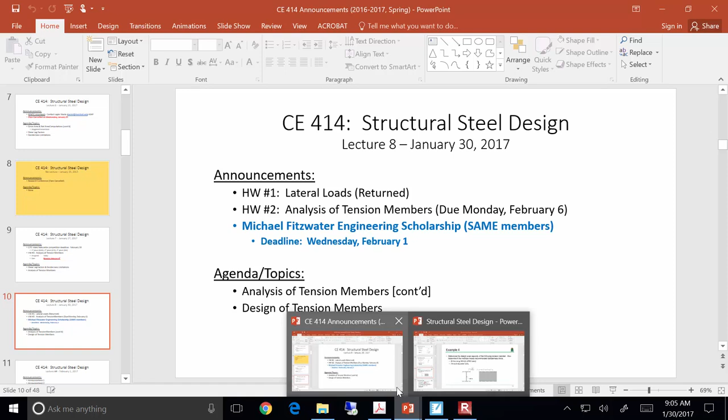Everybody good? All right, so today what I want to do is finish out that analysis example we were looking at, and then we finally get to start talking about design. So we finally get to start doing some design stuff today, and I'm pretty excited. But before I get into that, I want to do a little recap on what we were doing with our analysis example - this is probably a good place to start.

For the initial part of our tension member discussion, we were focused on making sure we knew how to assess two things: net area, which we spent a fair amount of time on, and shear lag factors, which we took a deep dive into last time. Ultimately I think it was pretty straightforward, but if you've got any questions, just let me know.

When we're talking about tension members, we really looked initially at two limit states: yielding in the gross section of the member, and fracture in the net section of the member. As we found out last time, it's not necessarily as clear as you'd think in terms of which one governs.

If you take a regular tensile specimen like you used in civil engineering materials and yank on it, yielding obviously occurs before fracture. But we're not cutting through the same section when we look at these members. Here we're looking at the gross section, and here we're looking at the net section.

When we did our analysis example last time, we found that fracture governed for that particular member because the net section governed. We had a smaller effective net area compared to the gross area, so that was ultimately the capacity that governed, which we'll get into the specifics of in a bit.

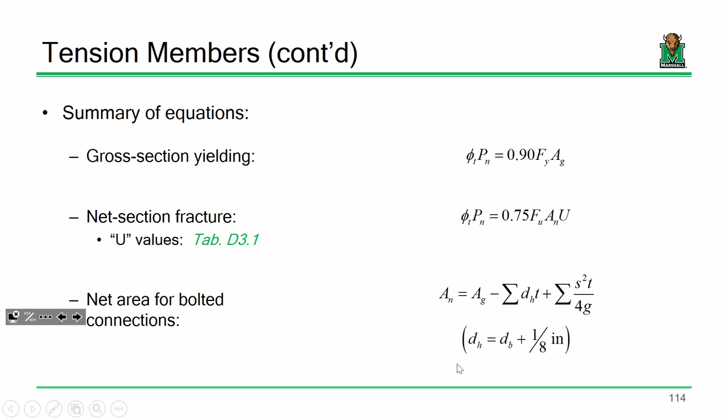Remember, we adjust that net area by a shear lag factor. Arguably the most common one is case 2. Shear lag factors according to case 2 are 1 minus x bar over L, where x bar is the connection eccentricity and L is the connection length.

Connection length is measured from outermost bolt to outermost bolt, and the connection eccentricity is from the back of the connected member out to the centroid. So it's just making sure you're using the manual appropriately and looking up the right values.

Now slenderness, we haven't done that yet today, but we're about to do it in a second. For slenderness, you just ensure your L over R is less than or equal to 300. We're going to add to this later, actually we'll be adding to it today, but that's where we're at so far.

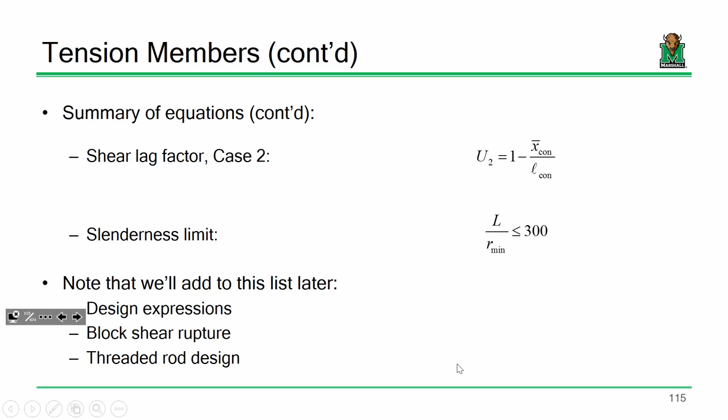This is the member we were looking at last time: a W8 by 24 used as a tension member, with 2 lines of bolts in each flange, and each line had 4 bolts. The member's made out of A992 steel, 40 feet long, with 3/4 inch diameter bolts. You've got all the dimensions necessary to assess the capacity.

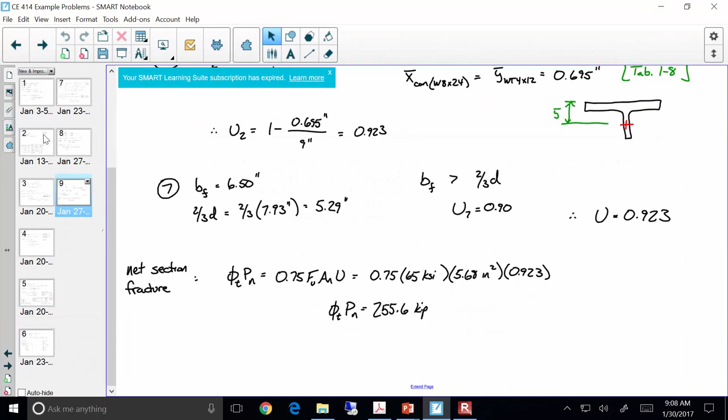We were looking at gross section yielding and net section fracture, so we went through our calcs. Let me go to right here—these are the calcs that we did last time. Starting off, we have our W8 by 24, so we looked up all the appropriate properties.

We haven't used the radius of gyration yet, but let me ask: for the W sections, which is the smaller radius of gyration, Rx or Ry? Ry—just making sure everybody's paying attention. That's one thing you'll always find for W shapes: Ry will always be smaller. It's just the way we notate steel sections.

If you have an I section, I sections by and large are stronger in one direction than the other, and that's what Ry and Rx indicate. Ry being smaller indicates that the I shape is weaker when bent about that weak axis.

We'll become experts at assessing slenderness later when we look at columns and members subjected to compression. Members in compression behave significantly different than members in tension, because members in compression like to do this little thing called buckling—that becomes a whole other can of worms later. For now, we're just looking at basic slenderness calcs, so we'll just go off of our Ry.

We looked up A992 steel properties and started computing values. We calculated two limit state capacities: gross section yielding, which gave us about 318.6 kips. So if I take this member and yank it, the gross section will yield at a load of about 318.6 kips, keeping in mind we've adjusted that with a safety factor.

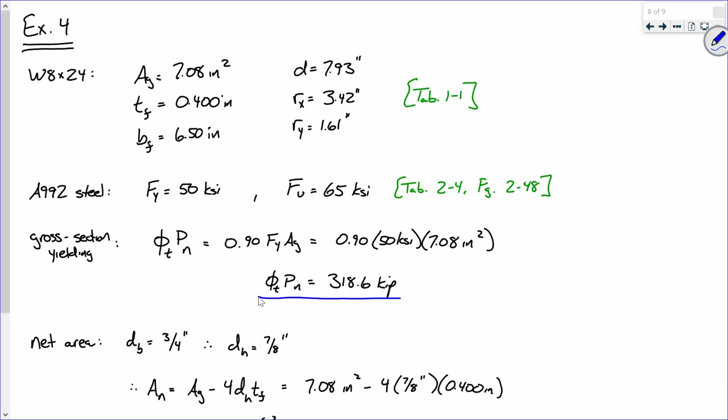We use our resistance factor of 0.9. Now that's for yielding in the gross section. For the net section, a little more work needs to be done because we have to calculate the net area.

Which we got as 5.68 square inches. Then we got to figure out which shear lag factor governs.

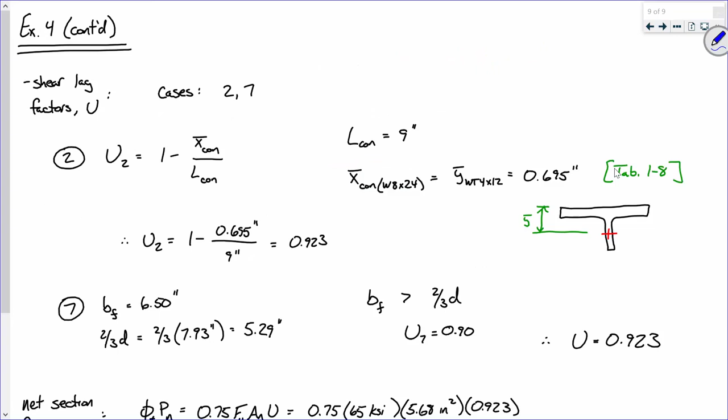So we calculated according to case 2. Remember case 2, we looked up the appropriate Y bar for the equivalent WT. So if it's a W8 by 24, we look up the Y bar for a WT 4 by 12. Remember, you're cutting the depth in half, and then you're cutting the weight in half. So it's a WT 4 by 12, and that comes out to be 0.695 inches.

So here's our U2, comes out to 0.923. And then U7's really just following the table and following the spec, that comes out to be 0.9. And then which one do you use? You use the larger according to the notation in case 7. And then finally we get a capacity of 255.6 kips.

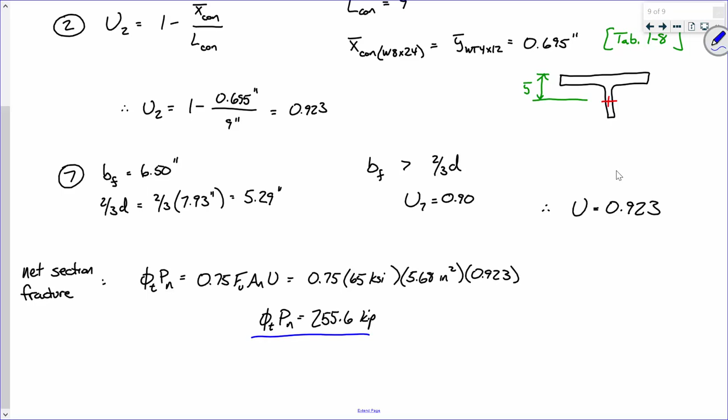Is everybody okay with that? Everybody good with that? Okay, now, so if everybody's good with this, I'm going to move on to the next slide because I got a couple things I want to do.

All right, excuse me. All right, so let's just sort of summarize where we're at so far. That U does not look like a U.

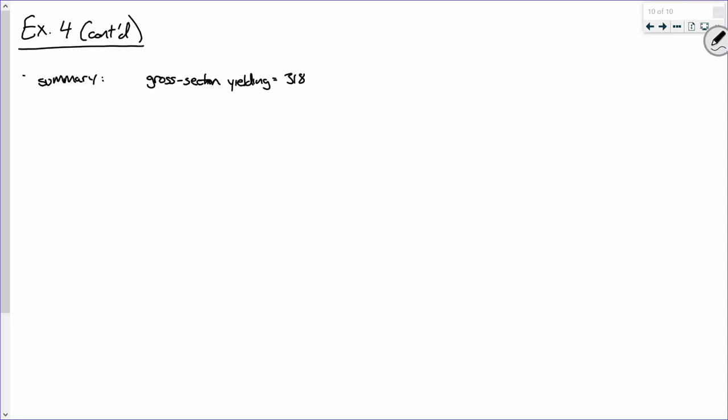So summary. If we look at gross section yielding, we got a capacity of 318.6 kips. But for net section fracture, we got a capacity of, what, 255.6, was that right? There we go.

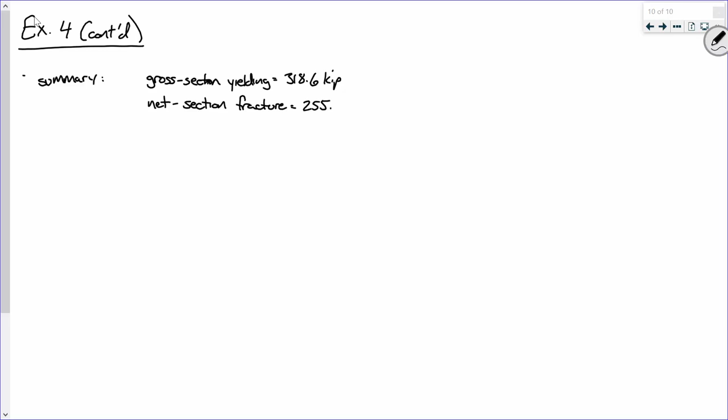So we've assessed 2 different limit states, one where we're governing yielding in the gross section and one where we're governing fracture in the net section. But if we want a simple expression of how strong this member is, in other words, how much load can we place on this member without violating the limit states, what would the answer be?

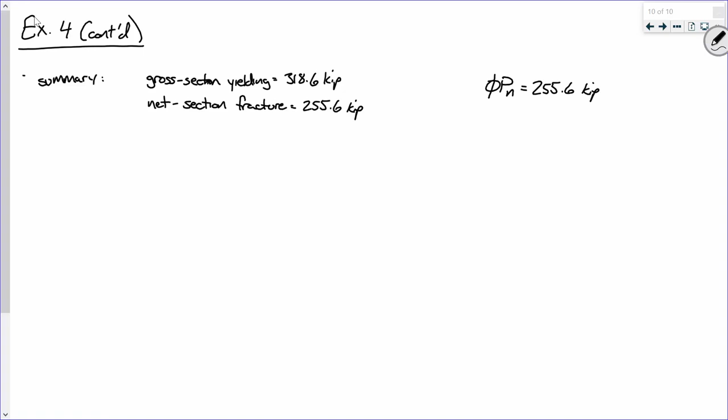Would it be the 318 or the 255? 255. So a simple answer to, we'll say, phi PN would be 255.6 kips. In other words, that is how strong the member is, that is how much resistance the member contains.

Now, if you're still a little like, well, I don't really understand what that means, I don't really understand what that value represents, I'm going to do something a little bit off to the side that maybe will help clarify what's going on. So let's do a little bit of calcs off to the side.

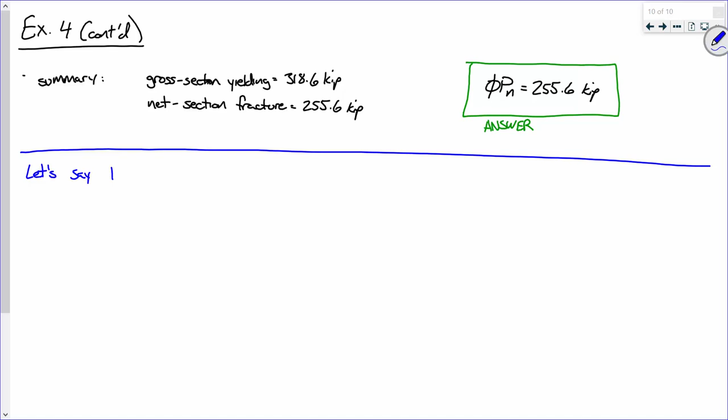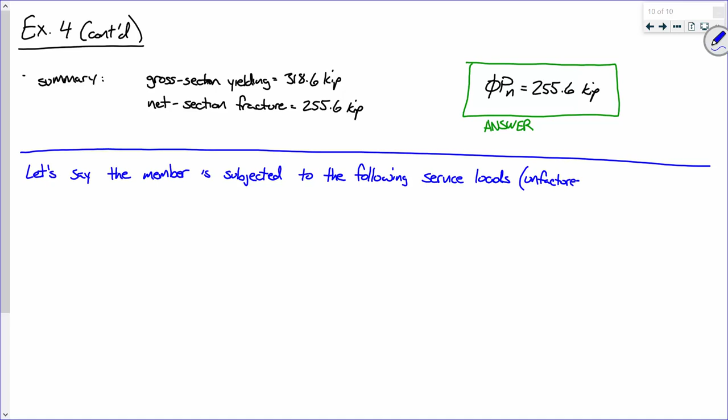Okay, now I want to describe the following. Let's say the member is subjected to the following, what I'm calling service loads. Now, service loads, that's just a fancy term for indicating loads that are unfactored, okay? So let's say that the member is subjected to the following loads.

And I'm just coming up with some values. So we'll say it's subjected to a dead load of 80 kips and a live load of 90 kips. And for the sake of discussion, let's assume that that 90 kips has already undergone the whole live load reduction stuff that we talked about in concrete design. So we've already reduced it and we've got a value of 90 kips. So let's just keep it basic, okay?

If I give you a dead load and a live load, what do you think we ought to do with those loads? Factor them, okay? And what's the load combo that we used off our last homework and one of the ones we're going to use throughout the majority of the semester? There we go, 1.2D plus 1.6L.

So let's calculate that out. So therefore, we'll call this P sub U, the ultimate factored load, is 1.2 P sub D plus 1.6 P sub L, which is 1.2 times, what, 80 kips, plus 1.6 times 90 kips. Now, if I calculate that out, what does that come out to be? Actually, let me write it like this.

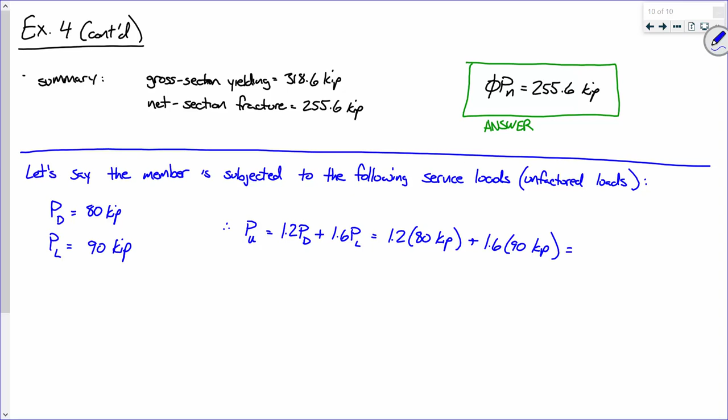240 kips. I have a second on that? Yeah, okay.

Okay, let's have a discussion about that. So, if the member is subjected to a dead load of 80 kips and a live load of 90 kips, let's be clear, okay? In reality, if I took a really high-capacity bathroom scale and I measured the load that was on that section, I'd get a load of, what, 170 kips? But that's not the load that I'm going to use for design because remember, there's more uncertainty associated with the live load than there is with the dead load.

That's why we're bumping the live load up by 1.6, whereas we're only bumping the dead load up by 1.2. So if I bump those loads up according to their relative levels of uncertainty, I get a usable load, a factored load of 240 kips.

Now, that's how much force is actually being applied to the member. So I'm taking the member and I'm yanking on it, and from applying appropriate factors of safety, 240 kips is what I'm going off of.

Now, let's take that 240 kips and compare it to how much load the member can withstand, which is 255.6 kips. Now, based on these numbers, is this member safe or unsafe? It's safe. It's good to go, right?

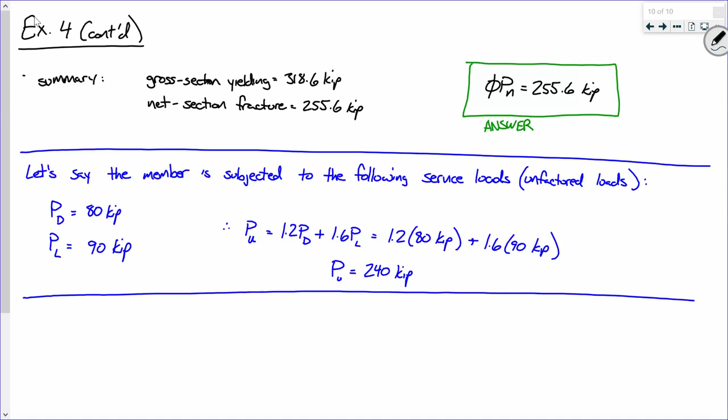Now, I asked you this earlier. What is the minimum radius of gyration? Ry. And what is that? 1.61 inches. What is the length of this member?

40 what? Feet. Anybody see a problem with that? So what is that in inches? Got to break out the calculator. It's Monday morning. Oh, no. What do we got? 480.

All right, I got a second on that? There we go. Everybody woken up. So now let's calculate L over R. Now what are the units for L over R ultimately going to be? No units. Yeah, it's going to be unitless.

So L over R is 480 inches over 1.61 inches, and that comes out to be what? So 298, we'll say 0.1. Is that good? That's good. So because that is less than 300.

So if you want, usually in engineering, it's common to put something like an OK next to that because that meets the limit. If it's not OK, then you'll sometimes see an NG for no good. So it's either OK or no good.

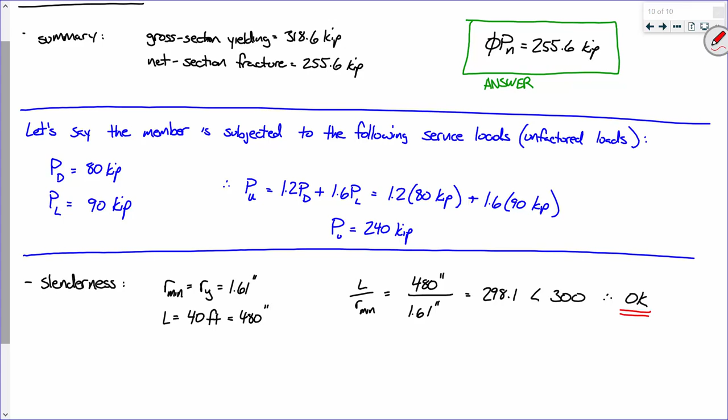All right, everybody good? Okay, so let's be clear on our purpose with this example. Our purpose was really to assess two things. Number one, we wanted to determine the capacity of this member according to yielding and fracture, which we did. Ultimately, by and large, the capacity was around 255.6 kips.

You would then compare that against a load to see whether or not the member is safe or not. So I came up with some random loads, and ultimately it was fine. We also determined whether or not the member meets slenderness limits, and we found it did. So, yes, sir?

That's a good question. I would say ultimately the answer is no, and here's why. If you technically open up the spec and read the slenderness limits, there are no slenderness limits in the spec. What we're using is a suggestion, okay? So I'd say we can hang our hat on using that as a suggestion. If it gets larger than that, we're not violating the spec. It's just becoming a little hard to handle.

So I would say, yeah, if you're at 298 or 299, that's fine. I wouldn't violate it, but I'd say it's fine.

One other point I'll mention is, let me take your question and extend it a little bit. Going back to those loads we looked at earlier where we had 240 and we had 255.6, what if it was 240 and it was like 240.1? The question becomes, should you use that member or should you just bump it up?

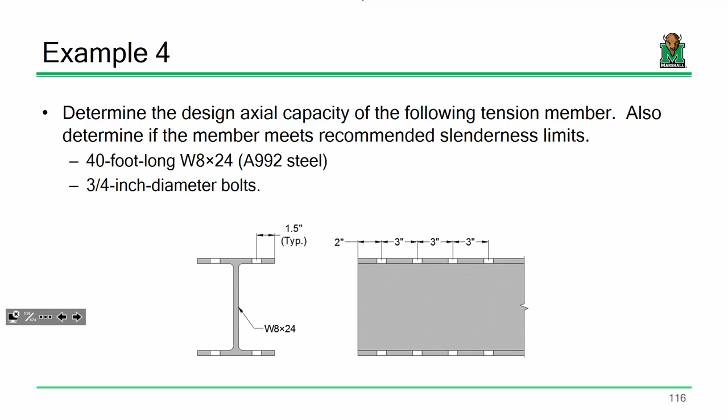Okay, all right. What I want to talk about is design. I want to talk about designing an element, in other words, selecting a member. If I give you a dead load and a live load, now you need to select something. You need to open that manual and find an element that works. That's the nuts and bolts of design, no pun intended.

Now, a couple things about the design stuff we're going to do in this class, and this is going to hold true throughout the semester. When we design, we are going to design by selecting the most economical section possible.

Now that's a loaded discussion in and of itself. Let's say somebody was designing the floor beams for this building, and there's hundreds of floor beams, and they did the math, and every single floor beam could use a W18 by 55. But there's that one floor beam over here that we could actually probably reduce to a W18 by 35. Probably just to keep the project simple, why don't we bump it up to a W18 by 55? That way they're all the same.

It's the same order, the same fabrication schedule. Ultimately, it's going to save time and money on the project. So we're taking that one and not using the lightest element possible—we're bumping its weight up a little bit. But in the end, looking at the whole project and the final bill, we're probably saving a little bit of money and time.

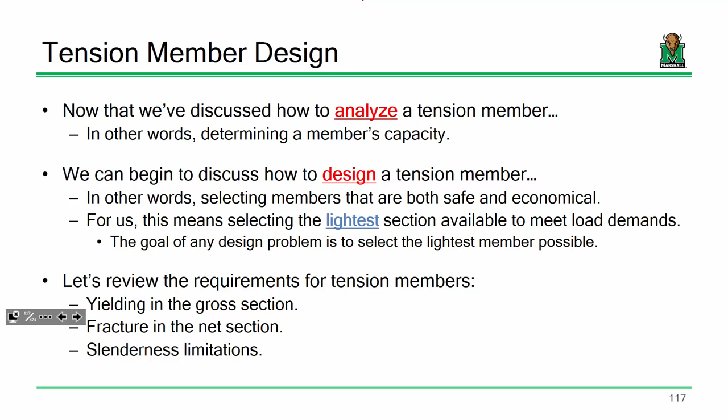Now let's talk about yielding in the gross section. Let's be clear on what we're trying to do here. We're now in a world where we don't have a clue what the element looks like. It's not like the last example where we're given a member with its size and all that—we don't know, because we're in design mode. Our job is to select that member.

But let's be clear: if we're talking about yielding in the gross section, what's our fundamental design philosophy? Our factored resistance has to be greater than or equal to our factored loads, right? Now, what is our factored resistance according to gross section yielding? Well, phi is 0.9, and Pn, our nominal capacity, is the yield stress times Ag.

Make sense? Now we're in design mode. What we're solving for is the area—we need to pick a member that meets this area requirement. So I'm going to solve for gross area.

So solving, dividing out everything on the left, I get the load. Remember this load, that's your 1.2 dead plus 1.6 live, whatever, divided by 0.9 Fy.

So I propose that when we are selecting members, we need to select a member such that its gross area is at least Pu over 0.9 Fy. Everybody okay with that? Okay. Now I'm calling that Ag min 1 because I'm ultimately going to solve for an Ag min 2 for fracture, so if you're wondering where the 1 and 2 come from. Okay, so that is yielding.

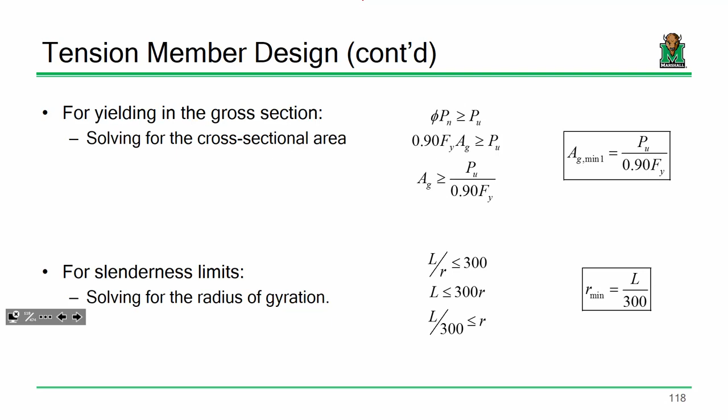So its minimum radius of gyration has to be equal to L over 300. So if I'm talking about a W section, I'd go through the W sections and find a member that has an RY of at least L over 300, because remember for W shapes, RY is always the smallest one. Sound good? Everybody good so far?

Now, here's the complicated one. Okay, let's actually take this out. Let's see if we tried to solve for a nice, pretty expression for a net section fracture. It would get a little complicated.

Okay, here's why. All right, we start off with the very beginning. Phi Pn has to be greater than or equal to Pu. Our factored resistance has to be greater than or equal to our factored loads. Okay, now what is our factored resistance according to net section fracture? Well, Phi is 0.75, right? And our nominal capacity is our tensile stress times AE, which gets a little complicated because you have to take the net area and adjust it by the shear lag factor, right?

Now, how do you calculate net area? Well, you take the gross area and you subtract your bolt holes and you add your stagger factors, right? Now think, we don't have a clue what the member looks like, you know what I mean? So how do we do that? That's tough, you know what I mean? That's not easy. First off, we don't know what, there might be a lot of stuff going on in this little bracket.

But what about U? U is highly dependent on the member we're looking at, the connection eccentricity. We have no clue what U is. And at the very least, think about net area. The most simple explanation of net area is that it is the gross area minus the area lost due to bolt holes. So at the very least, we're going to have a thickness, you know what I mean? Well, we don't know what that thickness is because we haven't selected the member yet, right?

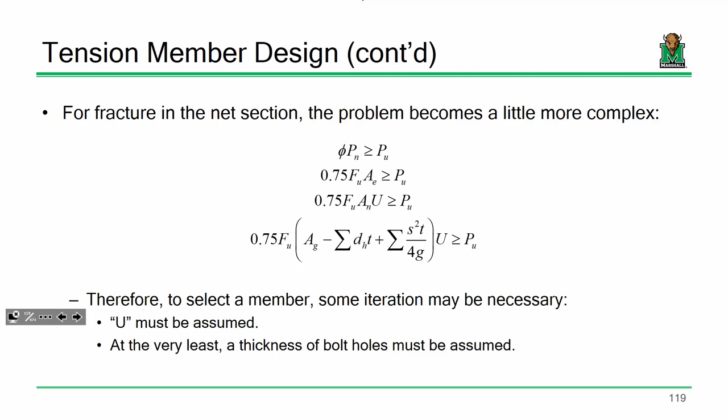So here's what I'm going to do, all right? What I'm going to do is I'm going to make a very basic assumption right off the bat. I'm going to assume that the effective net area is about 75% of the gross area. So this is taking the gross area, removing the bolt holes, getting to net area, and then adjusting by U to get effective net area.

Now, let's be clear, this is an assumption, okay? Because it is an assumption, when we select a member, it will be a trial member because we have to go and check that member and validate those assumptions that we made, okay? That's where design becomes an iterative process. We might select a member, go through, do all the math, and that member we selected, it's not good because we selected it based off some assumptions. So we might then have to select another member and do it again. So that's where design becomes a little bit of an iterative process. But this design assumption that we're using is usually a pretty good one. It should, in most cases, cut out a lot of the iteration.

So let's carry this assumption out a little bit and let's see what happens. So phi Pn has to be greater than or equal to PU.

So phi is 0.75, PN is FUAE. Now, for AE, I'm going to substitute 0.75 gross area, and that'll account for an assumption that'll account for my shear lag factors and my bolt holes. So if you notice, I've got two 0.75s in here. One of them is the phi factor, that's this one right here, and the other one is that assumption to account for shear lag and our bolts.

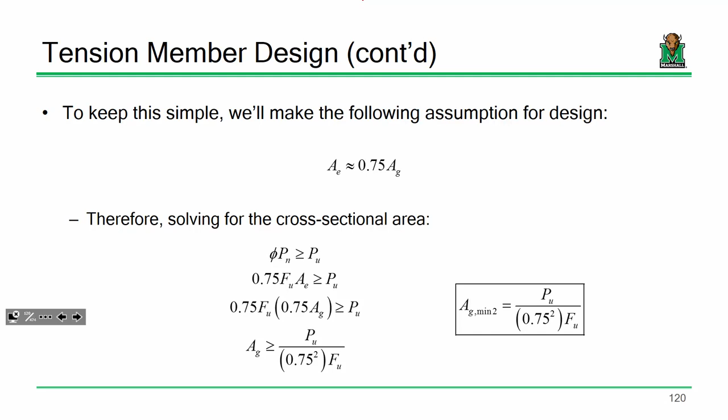All right, so here's a little slide that maybe you can summarize or put a little star next to. This might make your life a little easier for referring to your notes.

We can select members based on the following assumptions: that our minimum gross area has to be our load divided by the minimum of these two values. Because the smaller denominator is going to result in a larger gross area. I mean, think, if you calculate a gross area requirement for yielding and fracture, and yielding tells you you need about 7 square inches, and fracture tells you you need about 9, do you want to be selecting members that have at least 7 square inches or 9 square inches?

Think about that. Let me ask that question again. All right, I want you all to think about this. I know it's Monday morning and the coffee hasn't kicked in, but bear with me.

So we got two limit states. We got yielding, we got fracture. Now, yielding tells us when we pick a member, it's got to have at least 7 square inches. But when we do fracture, fracture tells us we got to have at least 9 square inches. Now, you're the designer and you're picking that member. Are you going to pick a member that has at least 7 or at least 9? At least 9. There we go.

All right, makes sense? Because if you pick a member and its area is, let's say, 9.5 square inches, it's going to meet the requirements, assuming all your assumptions are valid, of yielding and fracture, right? But if you pick a member and it's only got 8 square inches, you're going to violate one of those limits right off the bat, right? Make sense? And that's what's going on here. That's why you think a smaller denominator is going to result in a bigger computation.

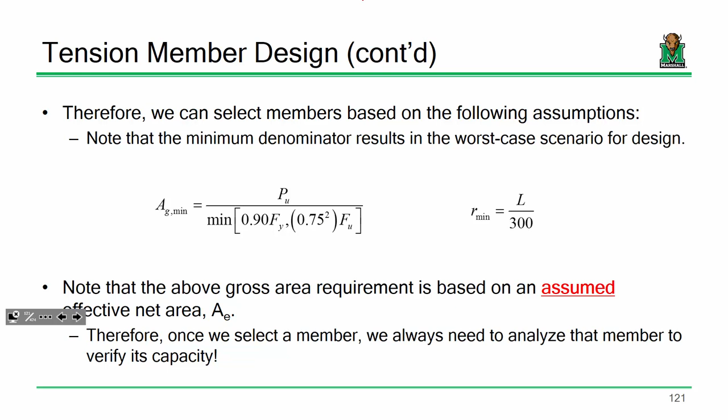Make sense? All right. So we have a minimum gross area requirement and we have a minimum radius of gyration. So based on these, we can compute what's our required member that we need to select. So that's a starred slide if I've ever seen one. Okay. Keep in mind, these are assumptions, so we're going to have to go back and verify our design.

Now, how do we know if our design is the most economical? Well, an easy way, or it might be the long way, but it's an easy way. The long way would be to do the following. Let's say I pick a member, I do all the math, and I check it, and I find it's good. An easy way to check whether or not that's the most economical design is to pick the next one down and do the math again, okay?

Because if I've got a member and it works, and I pick the next one down and it doesn't work, then the one I had before, that's the most economical, right? Because the one below it fails. So an easy way, but a long way, is to just do the math again.

But a nice rule of thumb that you can use is to calculate what's called the efficiency. In the world of bridge engineering, we call that a performance ratio. It's all the same thing. The performance ratio, or efficiency, is to just take the loads and divide it by the resistance.

And if you're getting a value that's around 0.9 or higher, that's a good check that your member's the most economical selection. So in other words, if you're on a test and you do all your math right, and you calculate efficiency, and efficiency comes out to be like 0.95, but just based on random probability, the next member does in fact actually work, I'd still give you full credit if this value is 0.9 or higher, okay?

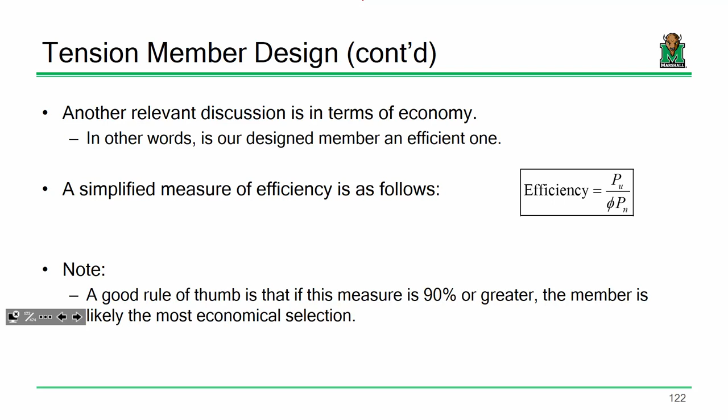Sound good? All right, so we finally get to at least start a design problem. I'm sort of excited about that. We definitely won't finish it, but let's go into the problem a little bit. Let's explain what's going on.

Okay, so we're going to do a design example. I'm going to design a member that's 30 foot long. So there are some values that I am giving you at the beginning, which is realistic of what is going on in the real world.

I mean, if you've got to design a system for a building, well, the architect's going to come in and say, here's about where the frame needs to go. So you're going to have a general understanding of the geometry.

And you also are going to have at least a reasonable understanding of the limits on your members. I mean, right here behind Mr. Schaffer, there's a column right here, okay? Now, the architect only gave the engineer so much space to put that column in here, right?

I mean, the column can't go all the way out here. You know, we might be able to get a lighter shape, but nobody's sitting here. They might not have a good time, right? Make sense? So it's pretty reasonable to have certain limits on your design.

For instance, we're selecting for this member, we're selecting a W12, okay? So what that means is that for this member, we're limiting its depth to about 12 inches, okay? And that could be based off of architectural considerations, architectural restrictions, what have you. And that's very realistic, okay.

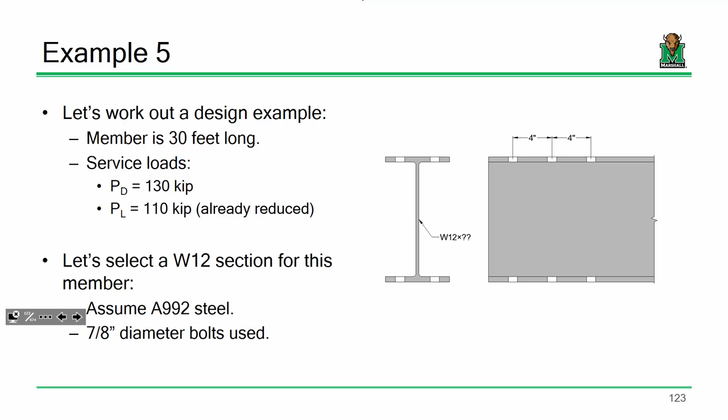All right, let's see, so what time is it? We'll do a couple quick calculations to get this example moving, and then we'll probably call it for today. But I do want to at least get us started. Okay, so help me out with something. So we've got some data here. What do you think is a good first step in our design? If you were given this design and didn't know what to do, what's the first thing you could do right now given this data?

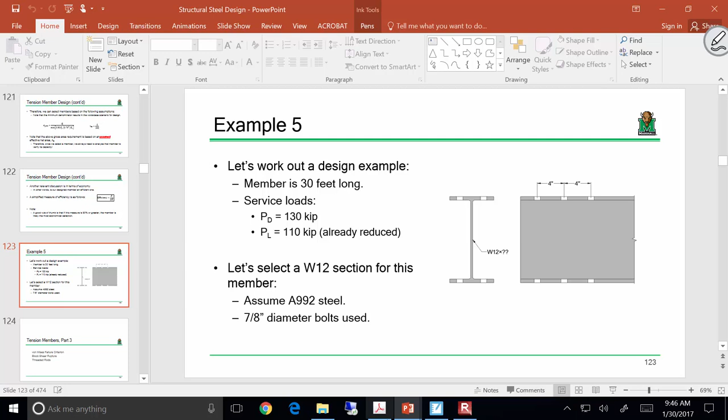Factor the loads, there we go. Factor the loads, so let's do that. Simple, right? All right, it's example 4 or 5. Five.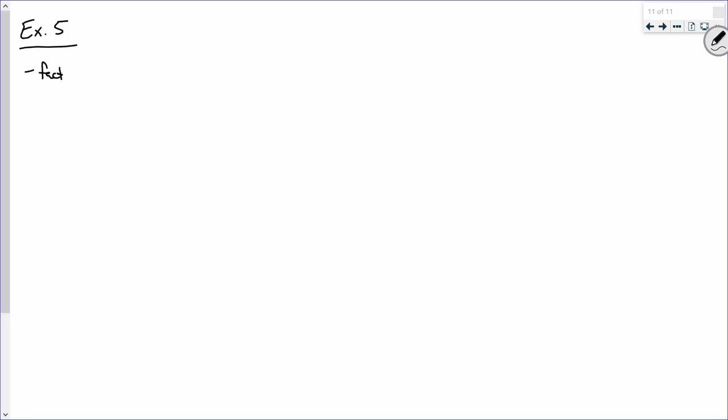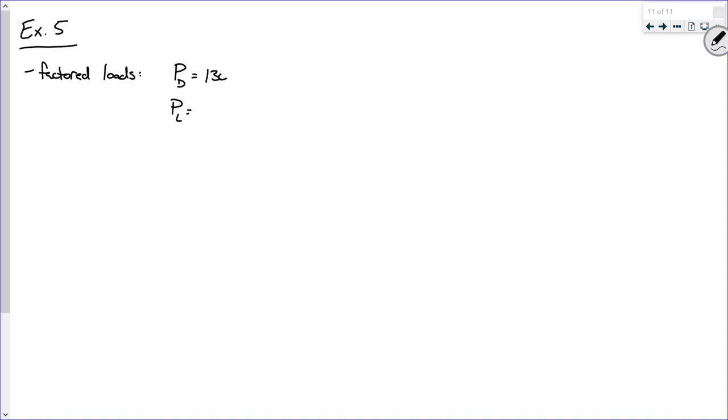Factored loads. Okay, so we're factoring loads based off the following. We have a dead load and a live load, and what are those? So tell me what to do. Have you tell me what to do. Oh, okay, all right. So PU, 1.2 times the dead plus 1.6 times the live.

So what does that come out to be? 332.

Now, we have been using 1.2 dead plus 1.6 live because, by and large, it is one of the most common load combinations that we will use. Are there any other ones? There's 8 more, where are they? They're in the manual. Now let's find them, let's find them. Say it again: page 2-11, and also 2-10, right? Remember I told you this is a section in the manual you might want to place a tab in, right? Everybody remember that? Everybody, I want to make sure everybody finds this.